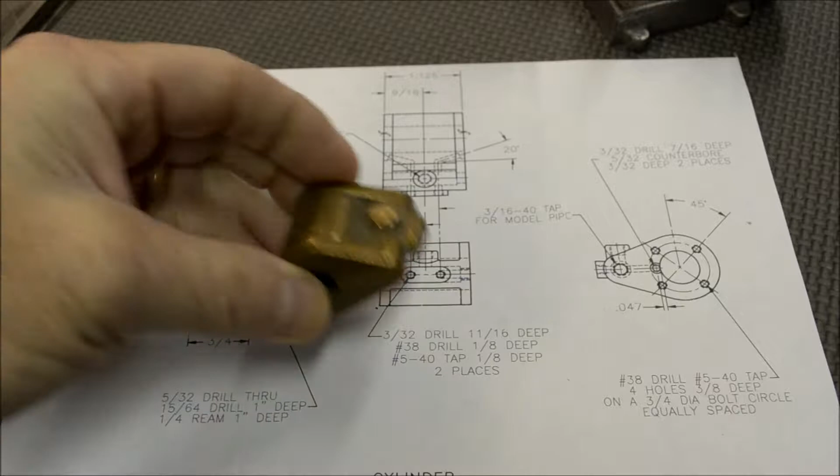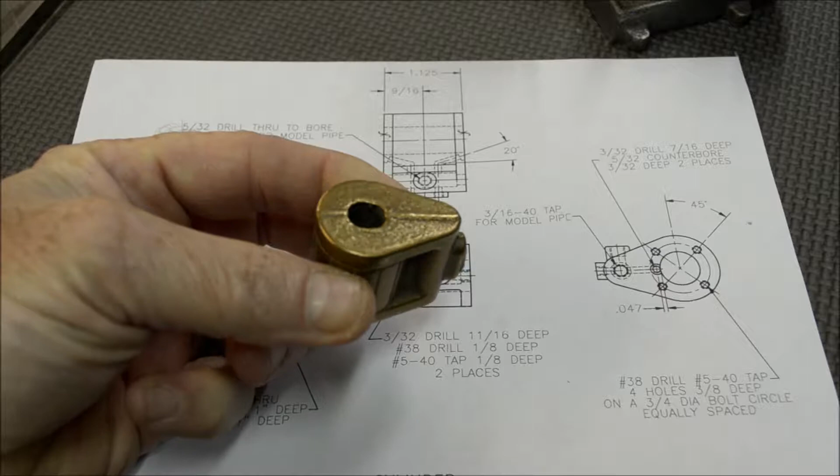Today we're going to start working on the cylinder. You can see from some of the drawings and dimensions here, this is going to be probably the most complex part to work on. Although the casting is pretty good, I would think. You can see the parting line here. I don't know how good you could see that. It's not exactly flat. Other side is the same way, the parting line.

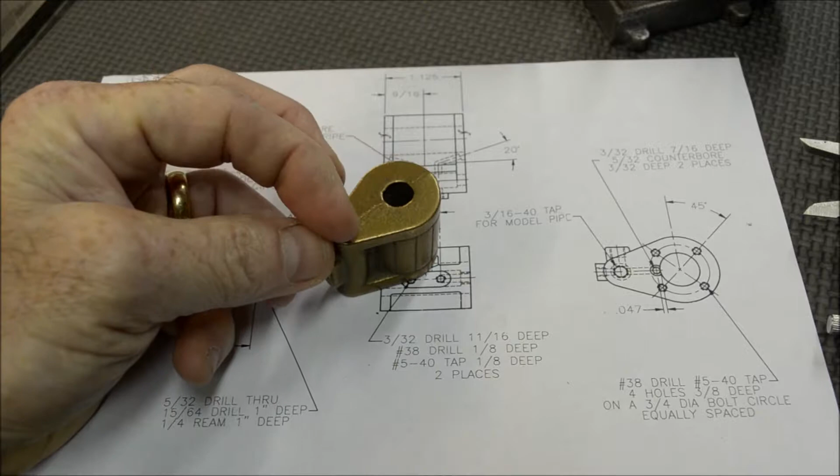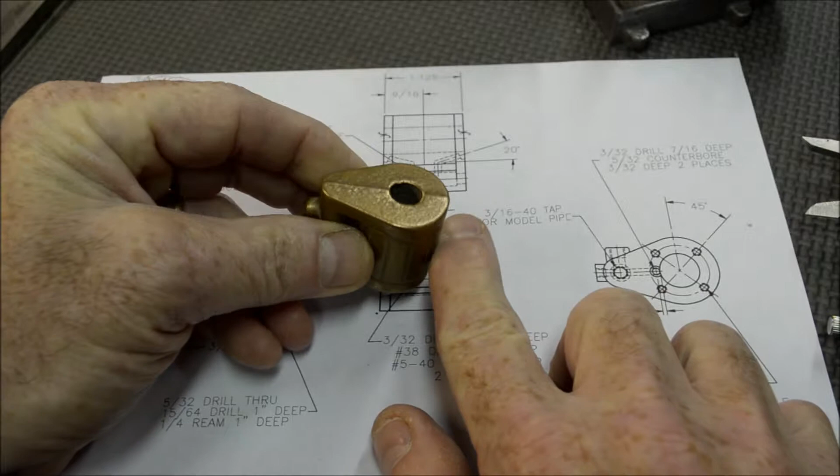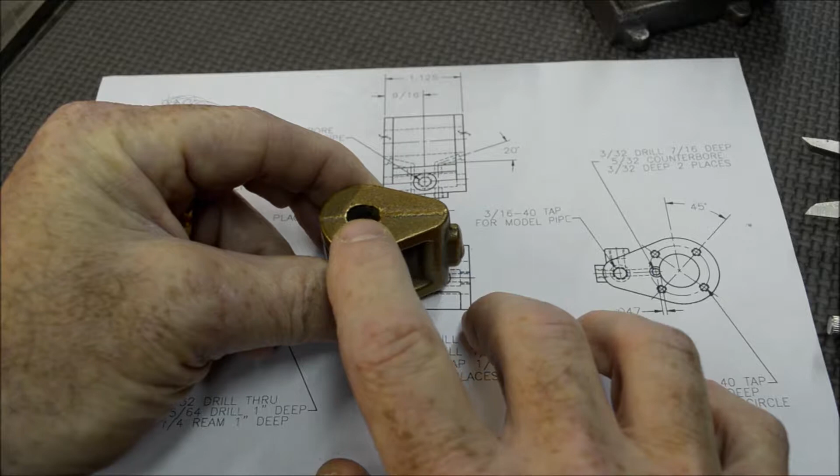Now we can do this in the 4-jaw chuck and face it and bore it with a boring bar. I think I'm going to do this in the mill. Going to figure out some sort of way that I could clamp this in the vise and get this as perpendicular as possible. Mill this flat, establish my reference surface, then I could flip it over, rest it on parallels, mill the other side flat, and then from there I could use a boring head, bore this out, and I'll probably just bring it over and drill and bore the hole for the valve, and then work on the other operations as they come.

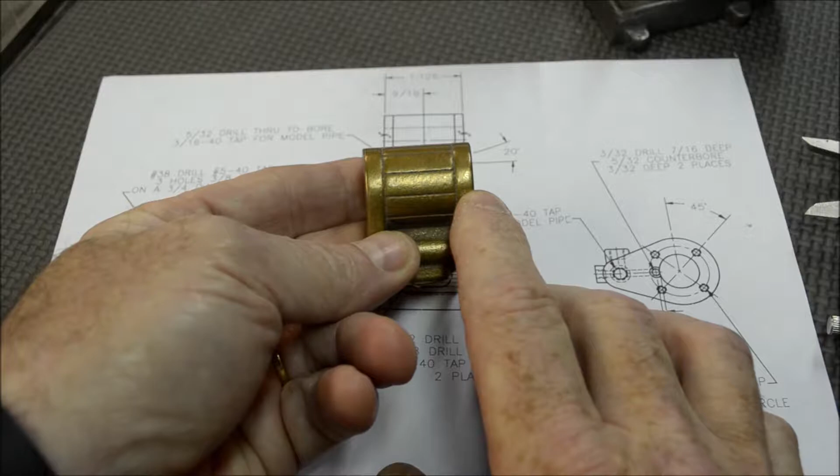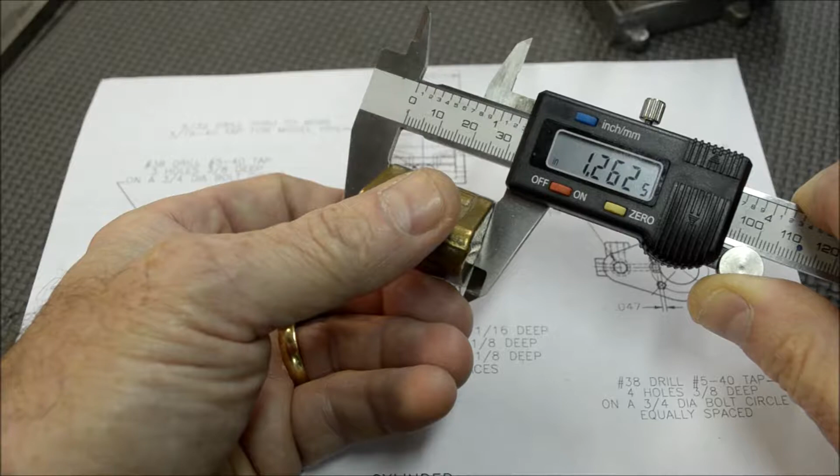So the overall length of this has got to be 1 inch and 125 thousandths. Right now I got about 1 inch 260, yeah, just about 260, 262. Okay, so I have a little bit of room to play with. I kind of want to keep this section centered, so I don't want to take too much off of this and not have enough. I kind of want to take equal amounts off of each side, so I'm going to be conscious of that.

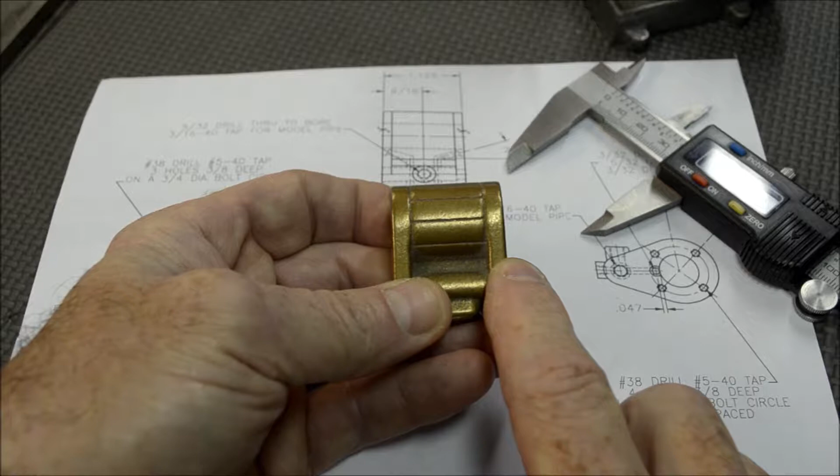I'm going to figure out something how we can clamp this up in the milling machine. When I get it all set up, I'll bring you back over there and we can take a look and start milling.

Well, alright, here we are again. I gave it some thought of how we were going to get this cylinder set up, held, in some sort of accurate way. There may be better ways to do it, I'm sure there are. This is the best thing I came up with the tools and equipment that I have. So I laid a long parallel down on the bottom of the vise just to give me a surface so I could put this V-block so it's sitting flat and straight.

I clamped the cylinder into the V of the V-block against the movable jaw here, and I set my indicator up. And this is pretty vague. It's a casting, but I had to pick a point, and I picked the two end bands of this casting here, and I set it up so that if you follow the dial indicator on the two bands, it's right there. I'm trying to get this surface here perpendicular to the surface here. So I know that this is vertical in line with the spindle, and I'll come across here and I'll mill this off.

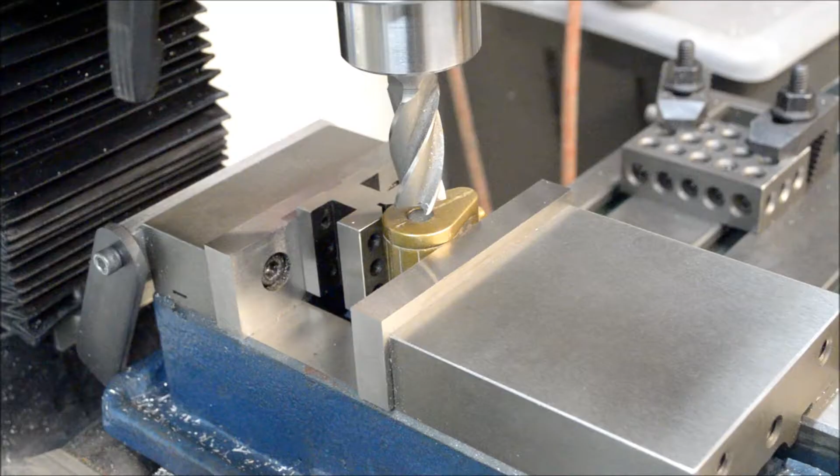Okay, so I got a 3/4 inch end mill in the mill, and I'm going to take down about 62.5, 63 thousandths off of that cylinder. So let's get started.

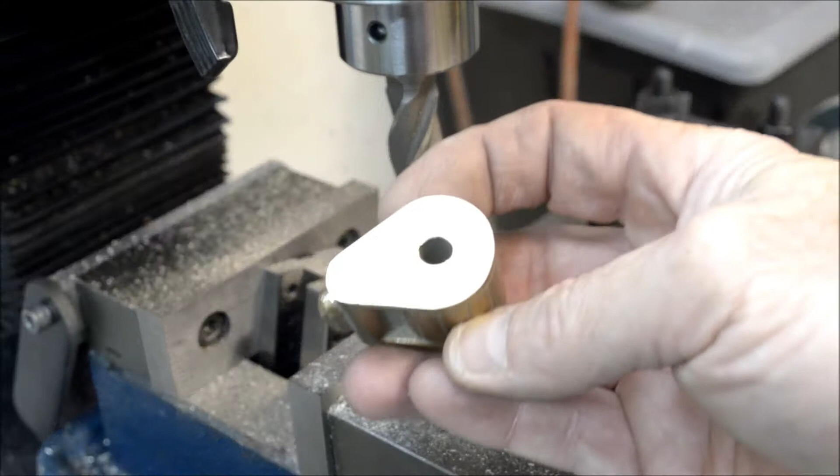Alright, here we are. This is what I got so far. I cleaned up the burr around the edge from the cutter. It left a little burr hanging off. I cleaned that up with a file. And then I took some 400 grit sandpaper on my surface plate, and I polished that surface up a little bit. So I went down about 50 thousandths on this. I should have gone down a little bit more.

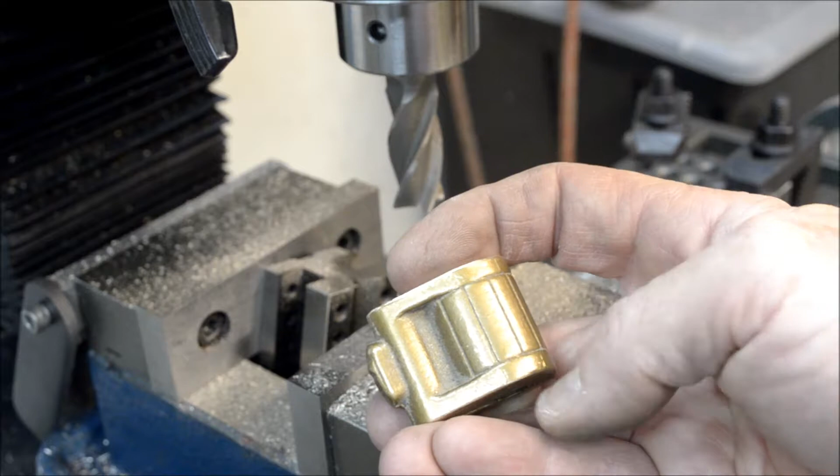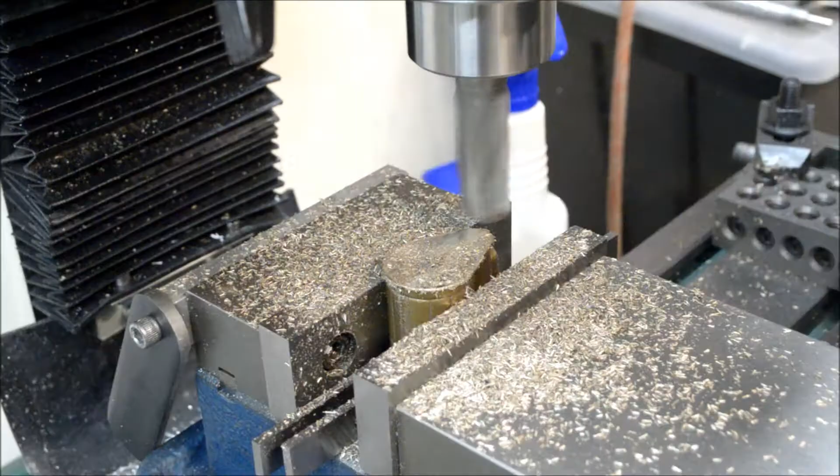I'm going to put this now back in the vise. This will be resting down on parallels, and I'll mill this flat here. All in all, I got to come down about 100 thousandths, 103 to be exact. So I'll come down about 50 like I did on the other side, and then split the difference. So 75 off the top, and I'll come back and I'll take another 25 off the bottom. Okay. Last pass this side.